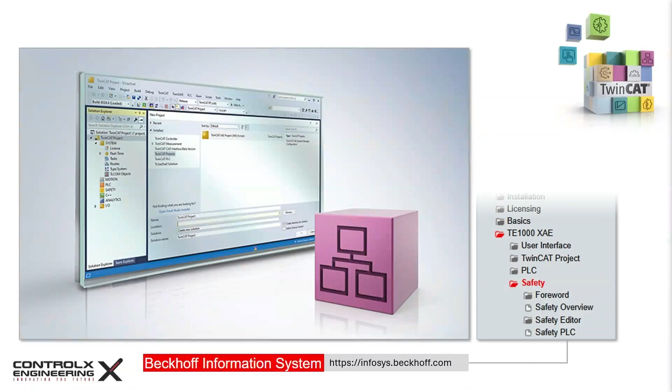The complete documentation for working with TwinSAFE can be found at Beckhoff Information System website.

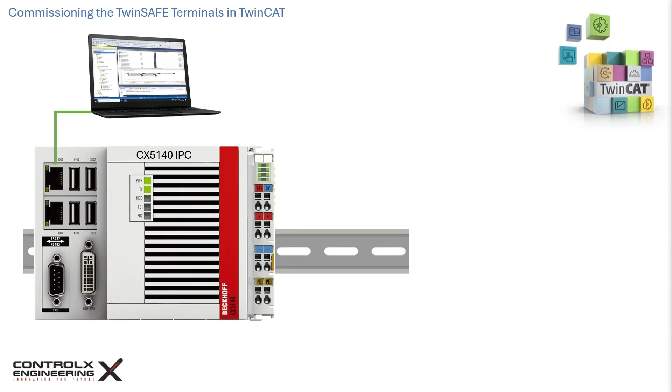Let's review my hardware setup for this tutorial. I will be using my CX5140 IPC. We will add a route to this IPC from my programming laptop, which I will use to create the PLC and safety logic. The first terminal in the configuration will be the EL2809, which is a 16-channel digital output terminal. We will link a standard PLC variable to control the green tower light connected to one of its output channels.

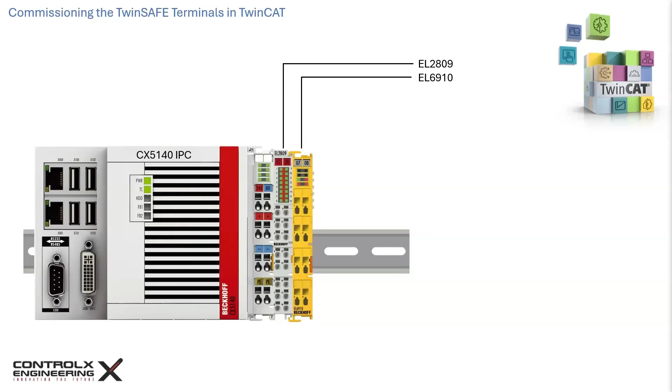Next, I've installed the EL6910 TwinSAFE logic terminal. This is where the safety logic will be programmed and saved. If you recall our application from part 2 of the series, we had a dual-channel e-stop, 2 push buttons, and a dual-channel safety door interlock switch. These required six input channels. Therefore, we required 2 EL1904 safe input terminals, each with 4 channels. And for our safety outputs, we have the 4-channel EL2904 terminal. Finally, we will terminate with the EL9011 end cover for protecting the electrical contacts on the last terminal.

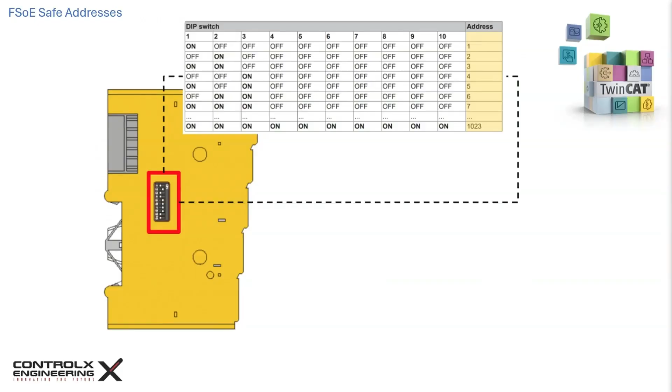In part 1 of this series, we reviewed the TwinSAFE hardware and learned how to set the safe addresses on the terminals using the 10-position dip switch block on the back of the terminals. Devices like the EL6910 and EL2904 have single dip switch blocks with 10 switches labeled from 1 to 10, which gives us addresses from 1 to 1023 as shown. Each FSoE address has to be unique and can only be used once within a network. Also note that 0 is not a valid FSoE address.

Last time I showed you how to manually set up the FSoE addresses for these terminals using their Alias devices. This time I'll show you how to scan the FSoE addresses automatically from the terminals via their aliases. If you don't know what aliases are, then I encourage you to check out the previous 2 parts of this series. To make it interesting, I have assigned random FSoE addresses to the 3 I/O terminals, and I will show you how to scan them in the hands-on portion of this tutorial.

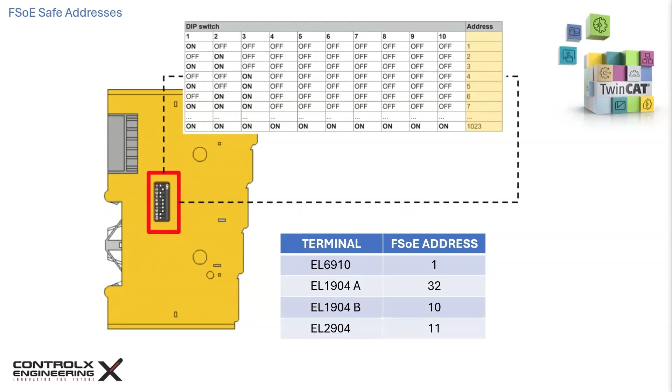Back in the safety node of the Solution Explorer, we already learned how to set up the EL6910 as the target system, which serves as an alias device for the EL6910 logic terminal. Since we did this virtually in part 2, none of this information was available. However, once we have the hardware connected, it will display the information from the EL6910 terminal. This field shows the serial number, which is unique for every logic terminal. It is also printed on the side of the EL6910 along with the date code.

This field will display the project's CRC code. After the safety logic has been downloaded to the terminal, the CRC of the program stored on the target system is displayed here. Currently it's displaying 0 because this is a brand new terminal out of the box. Checking these 2 boxes adds the mapping of the serial number as well as the project CRC, which will now become accessible under the EL6910 terminal in the I/O tree.

The serial number will be available as an unsigned double integer and can be linked to a standard variable, which makes it accessible to the PLC. The safe address is also retrieved from the logic terminal and displayed here both numerically as well as graphically, showing the position of the 10 switches on the dip switch block.

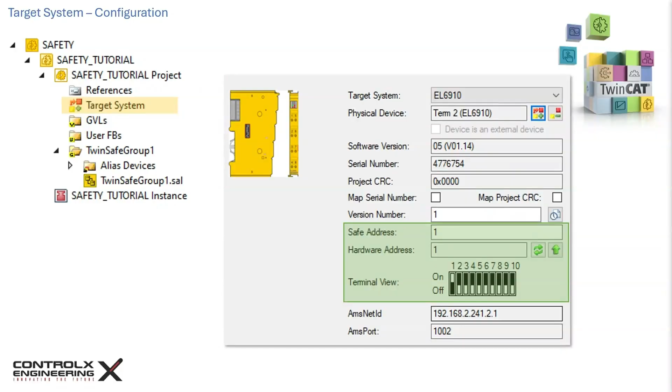The safe addresses of the TwinSAFE I/O terminals are configured in their respective aliases. Double-click on the alias for the terminal you want to configure. On the Linking tab, we can see the physical dip switch address here. For this terminal, the address is set to 32. Click on this green arrow button to assign the hardware address as the FSoE address.

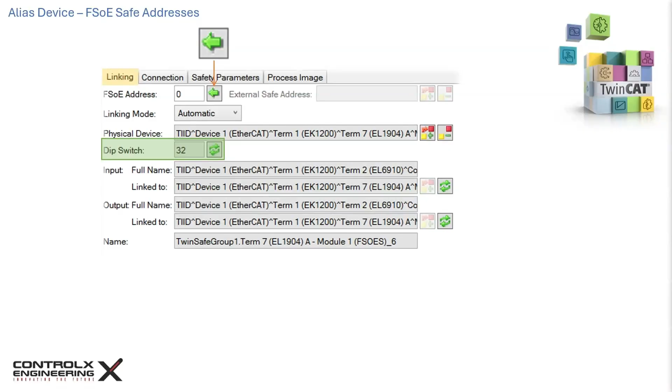This step needs to be repeated for all the safety aliases. However, this step can be taken care of automatically if the aliases are imported from the I/O devices directly. Next, move over to the Connections tab. The info data contains useful diagnostics information that can be made available in the process image of the logic terminal. This allows the information to be mapped to the PLC, if required, by linking with standard PLC variables.

I highly recommend checking these two boxes to map the inputs and outputs for all the TwinSAFE I/O terminals. This is particularly useful if you want to monitor the safety channels to display that information on your HMI. As an example, imagine a machine has multiple e-stops and safety switches. Mapping the inputs allows you to show the operator which device triggered the safety stop. Similarly, mapping the output applies to the EL2904 terminal to monitor the status of the output channels.

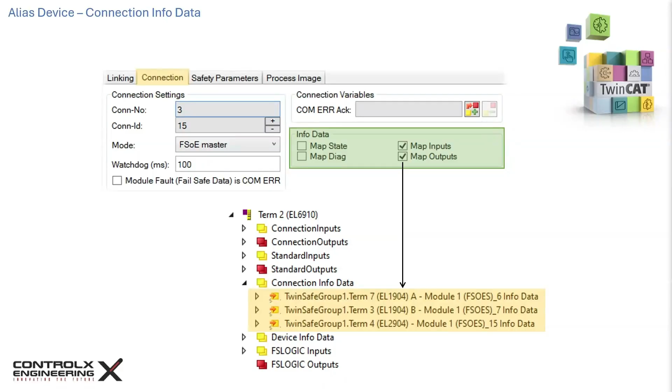Keep in mind that these mappings are for monitoring purposes only and cannot be used to change the state of the safety channels from the PLC. I will show you how to link the standard PLC variables to monitor the state of the safety channels next.

The Safety Parameters tab is available on both TwinSAFE input and output terminals. Here I'm showing the tabs for EL2904 and EL1904 terminals. These are advanced settings and have to be set correctly to match the required performance level for the application. I will not be covering this part in today's tutorial.

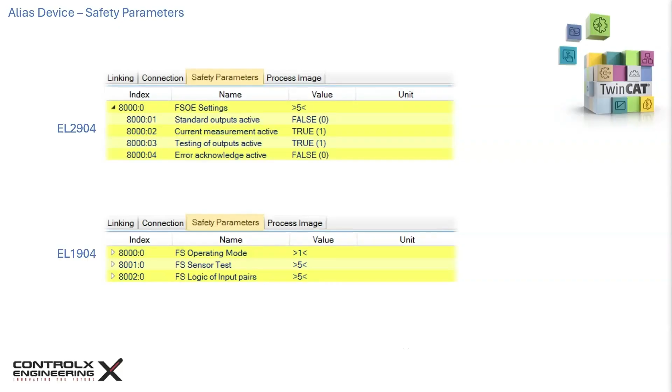The EL6910 has 8 LEDs as shown here, 4 for diagnostics and 4 for states. The diagnostic LEDs were covered in part 1 of the tutorial series. 3 of the 4 diagnostic LEDs are red and only the diagnostics 1 LED is green, which indicates that the operating voltage and internal tests are good. When the terminal is first powered, the diagnostic 1 LED should always be lit green.

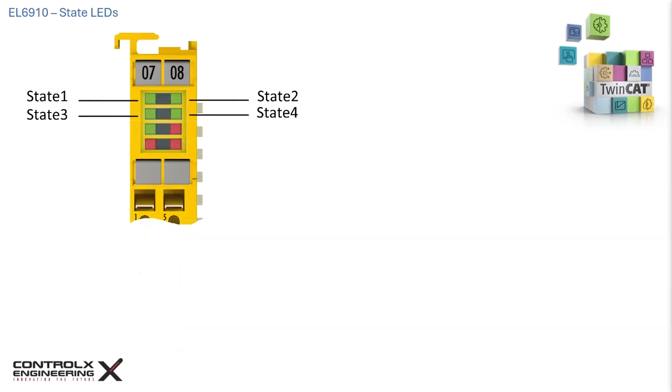The other 4 green LEDs indicate the state of the logic terminal. A brand new EL6910 out of the box has no program loaded on it. Only the state 4 LED will be illuminated when first powered up. The other 3 state LEDs are off. When a project has been downloaded to the EL6910 terminal, all 4 state LEDs will be illuminated at power up.

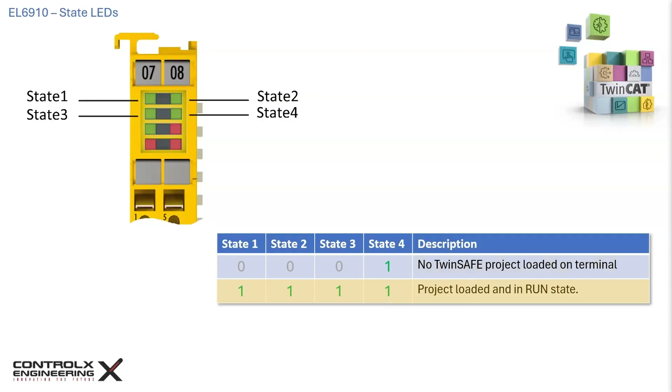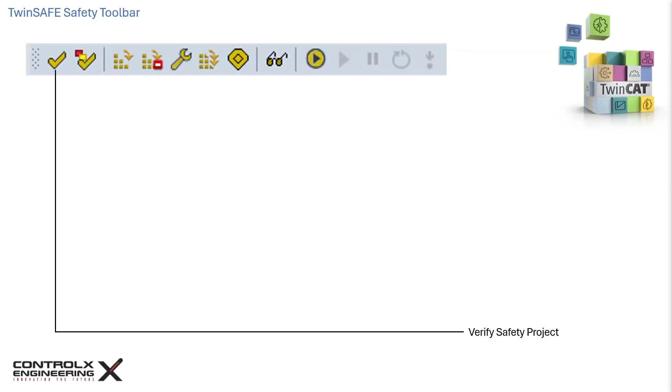Let's review the various toolbar options available for TwinSAFE. We have used this button previously when developing the safety logic. This option verifies the safety logic on the project level, meaning that only software properties are verified, no hardware connection. This option verifies the complete safety project on both the project as well as hardware level, meaning that hardware connections and availability are also validated.

This button allows downloading of the safety project to the target system. During the download process, the user credentials will have to be entered, like username, password, and serial number of the target system. We will review this process in more detail shortly. Logic can only be downloaded to the safety terminal after it has passed the validation check. This button allows us to delete the safety logic from the target system. User credentials will have to be entered similar to when downloading to the target.

The Customize button is used for advanced applications like switching off TwinSAFE groups and setting safe substitute values for the group outputs, etc. For this tutorial, we will not worry about this function. The multi-download button allows us to download all safety-related configurations and logic to the selected TwinSAFE target devices in one operation. This includes the compiled safety logic, safety parameters, and configuration data for all TwinSAFE modules associated with that logic terminal. It is essentially a batch deployment tool for safety projects.

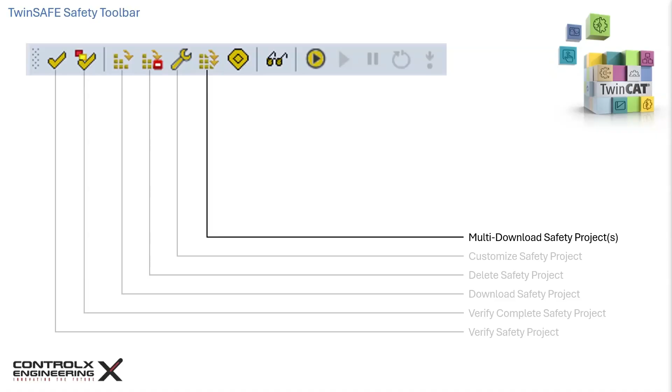While a standard download button sends the program logic to the target device, the Download Safe Addresses button specifically targets the FSoE slave terminals such as EL1904 or EL2904. Use this button if you have changed the safety address using a dip switch and only want to update the FSoE addresses without downloading the full safety project.

The Glasses button is my favorite. It allows us to view the online data for the target system. In this view, active connections and ports of the used function blocks are shown highlighted green, as we saw earlier. This button only works when both the safety application on the target system and the TwinCAT XAR runtime are running.

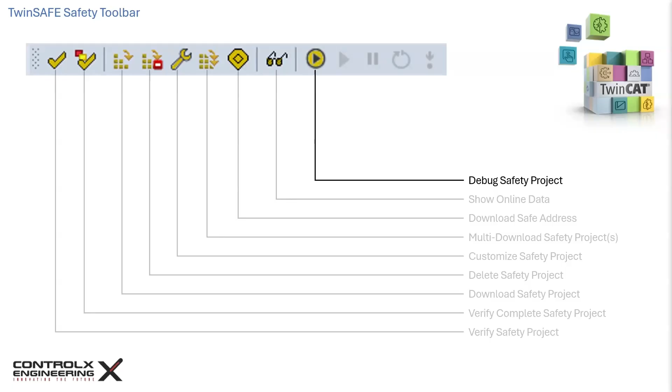The debug function allows us to test our program safety logic virtually inside the development environment without downloading it to the target system first. I demonstrated this feature in part 2, so make sure to watch that. The remaining buttons are all related to this debug function. Once you enter the debug mode, hitting this button starts the simulation. This button allows us to pause the simulation.

This button allows us to run one cycle only. When the simulation is running, we can hit the pause button and then use this button to execute one cycle. Similar to the one cycle function, this button allows even more granular logic execution by activating one function block at a time. Pressing this button again executes the next function block and so on.

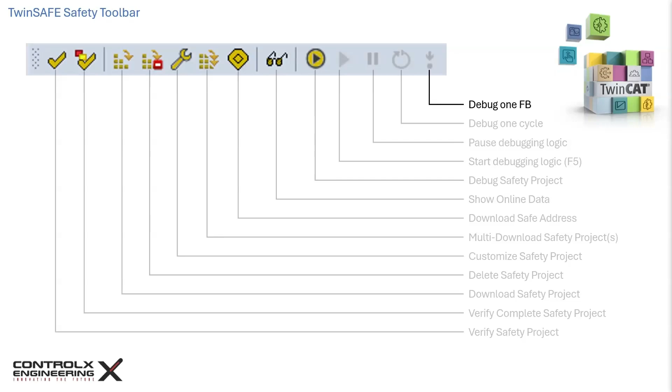The function blocks are executed in order of their execution number. If you look at the function blocks, they have a number on the top right corner, which shows their execution order.

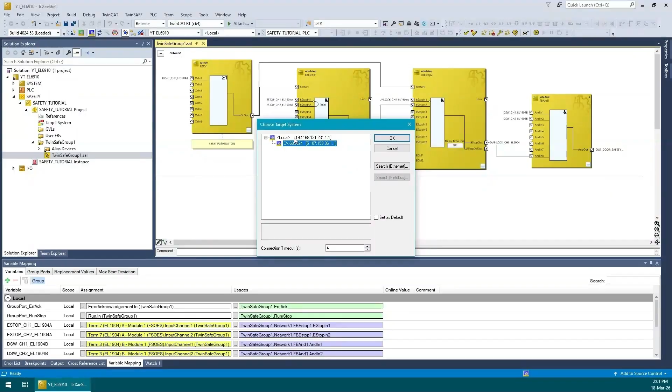Alright, now let's dive into TwinCAT and bring our safety logic to life. I'm in TwinCAT 3 and I have the project open from last time. This time I have my physical hardware connected, so my working laptop is connected to the CX5140 IPC from Beckhoff. The first thing we're going to do is connect to the IPC. So let's pretend we don't have this thing set up for us. We would go into search.

Now if you know the IP address of your IPC, you can type that in. In my case, it's 170.16.3.250, and it finds it right away. But let's try another way. We'll do search, and this time we'll do a broadcast search. Now it will give you an option of all the available adapters. If you know which adapter your IPC is connected to, you can just leave that one checked. In my case, it's connected to this one, so I'll leave everything else unchecked.

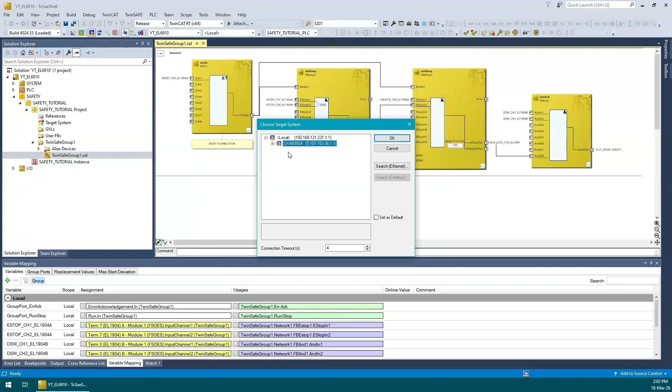It's doing a search, and it finds my IPC. Now for me, it's already connected. For you, if it's not, you would highlight it and click Add Route. Then we can close and select the IPC and hit OK. So now here you will see your IPC listed instead of local. So now we are connected to the IPC.

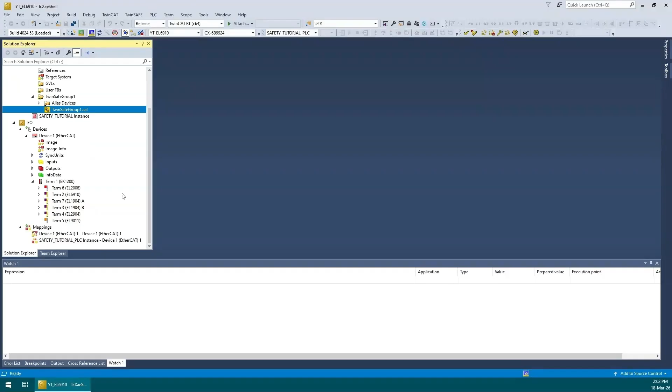Let's head over to the I/O section. We don't need this for now. Now this is my I/O. I'm going to collapse everything. Now the one big difference is if I look over my I/O, I have the EL2809 output channel, but in part 2 of this tutorial we worked with EL2008, so obviously we'll have to change that. But we have to do one more configuration setup before that.

Let's head over to the device, top level, and we have to modify the adapter. Right now it's set for this option. All my I/Os are on the PCI slot, so we'll select PCI. So if I do a search, these two are the RJ45 connectors. My I/O terminals are not connected to a remote coupler, they're connected directly to the IPC, so we have to select this. Now here it shows the selected PCI slot. Once that's done, we do a reload.

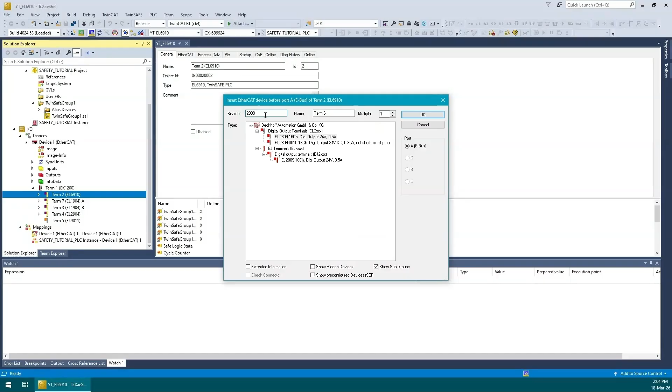And actually before that, I have to change this. So I'm going to go ahead and delete this card. And in its place, we are going to put the EL2809. Now remember, we have to do an insert to add an item on top of this. So from here, I can do a search, 2809, and that's my card. So that's added. Let's do a reload now. Now we can say no to activate free run.

And now let's head back to the top level and let's check out our topology. Let me just zoom into this. This is the offline topology, and this is my 2809, and then my logic terminal. This is the A, B, and 2904. So we can do a show topology. And once you see this, that means your online and offline topologies are matching. So far so good.

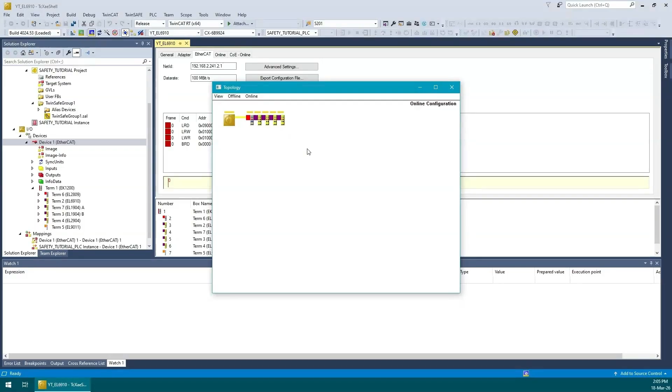We can close this. Now we are done with the I/O for now, so we are going to collapse this. And next thing we have to do is update the target system. So let's go back to the target system, hit the plus button, and select our EL6910. And now you will see it has populated all this information. We have the software version, serial number, and the project CRC. So currently it's 0 because there is no project downloaded onto the terminal.

Most important part here is the dip switch address. I have set it to 1, which we can see here, and it shows that numerically here. Now because we scan this in, the FSoE address is automatically taken from the hardware address. If for whatever reason this number is different, or if you have changed the hardware address after this step, we can click this up arrow and that will copy this to here.

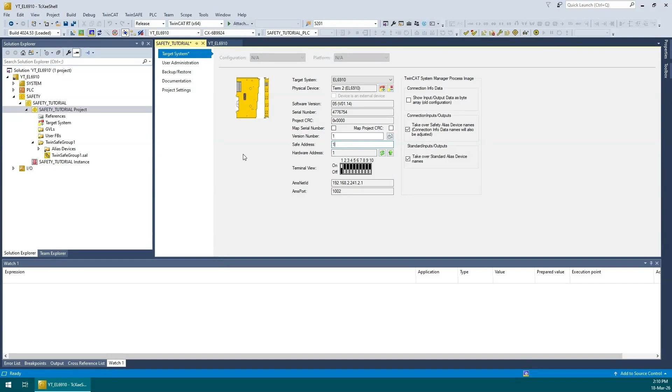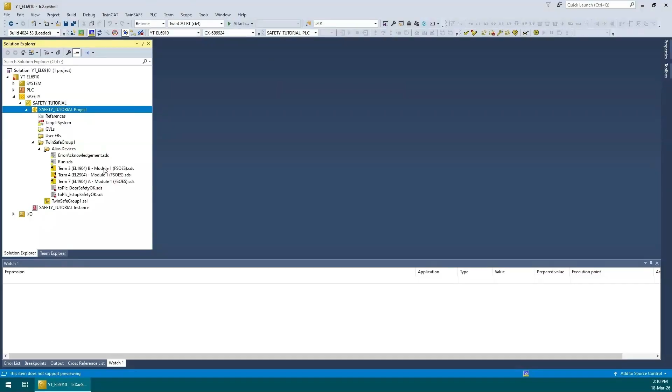Similarly, we have to update the FSoE address for all the other terminals. So I'm going to do a save and close this part. You can close this. Expand the alias devices and update the aliases for FSoE for all the 3 aliases. I'll start with term 7 A. So my dip switch is set to 32, but if you recall from the previous tutorial, we had set this manually to 4. So all we need to do here is take over, and it copies 32 here.

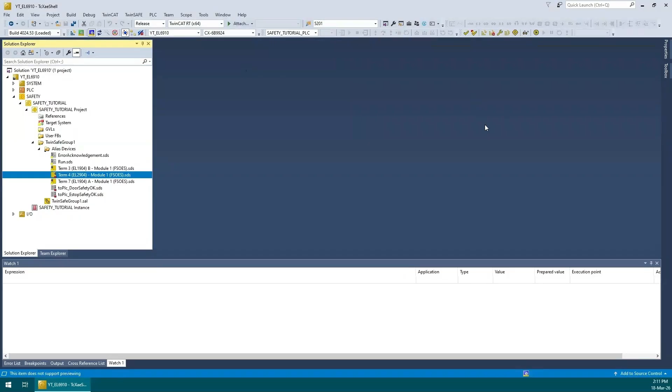Okay, all 3 addresses are updated. We can do a save all and close everything. Now we can do a safety validation. It says verification process succeeded. Let's just take a look at our safety project.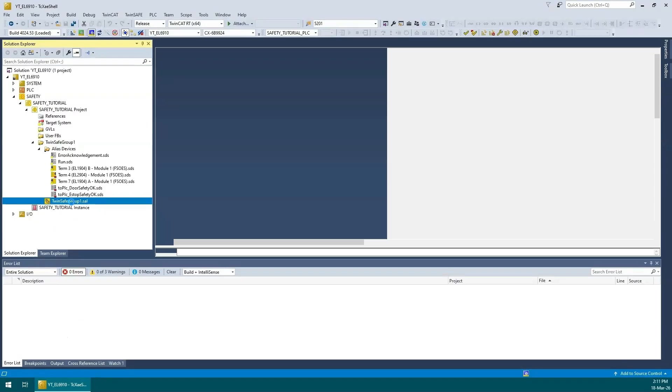In order to link all the I/O statuses to the PLC, we have to map the inputs and outputs. So let's do that. I'll go from top to bottom, go to the connections page and map inputs and outputs. Similarly for the other 2 cards. Now we can save all. And we do a build.

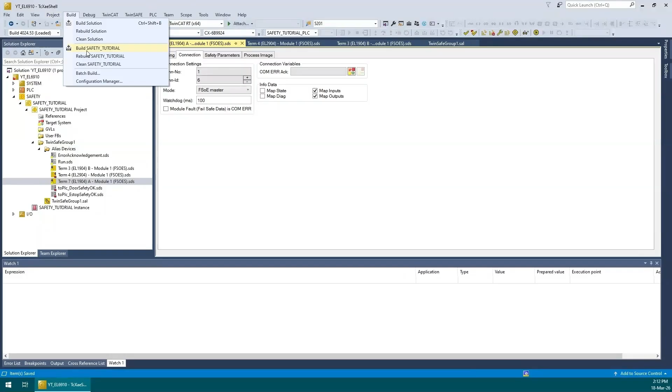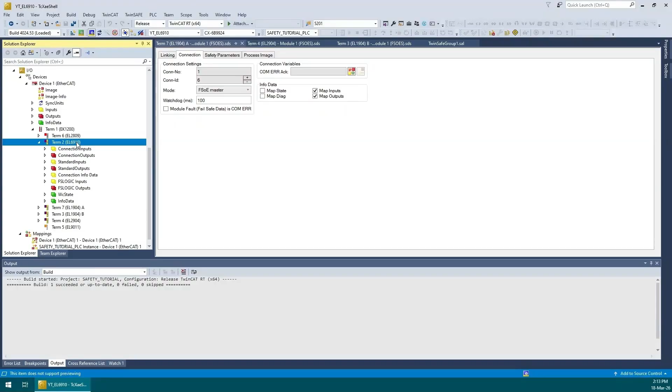Now we head over to the I/O section, expand the EL6910. We see this new item added here, which contains all our mappings. So this is module A. If you expand it, you have the 4 channels.

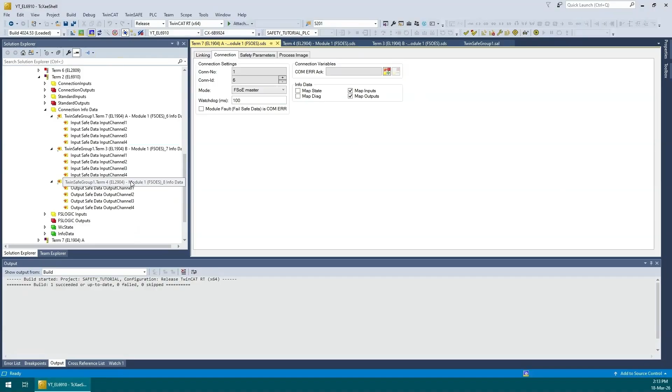So before we activate the project, we can create all the standard variables in the PLC and we can start linking them to here. So I'll go ahead and do that now. Let's head over to the PLC side and we'll create a new GVL.

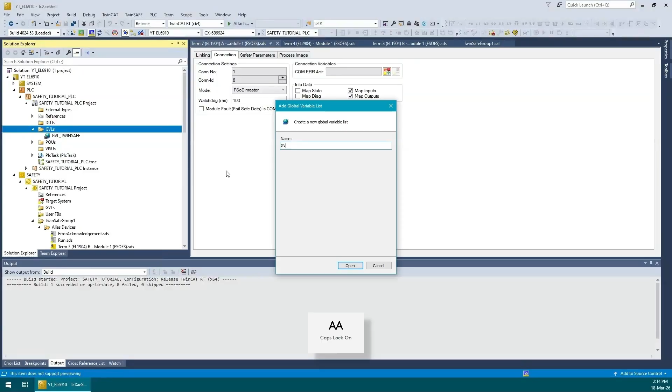My variables are created. So let's just do a quick recap. I have my e-stop on channels 1 and 2 of A, my reset push buttons on channel 3, and the unlock request buttons on channel 4. My door switch contacts are connected on channels 1 and 2 of the second safety input card. My safety output relays are connected on the channels 1 and 2. The lock command for the safety switch is on channel 3, and the door safety OK relay is on channel 4. So I'll go ahead and link these to the channels. But before that, we have to do a build.

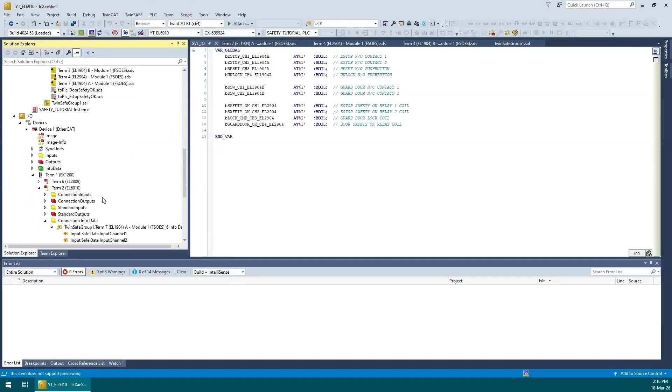Now if you look at the PLC safety instance, which is right here, if you expand this, our inputs contain all these variables. These are the only 2 outputs. So let's go ahead to the EL6910 in the I/O terminal and start linking them. So you would link these just like any other terminal. You can right click, do change link. This is channel 1 on A.

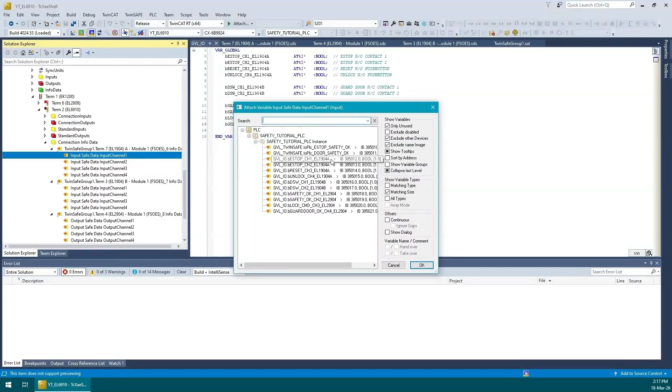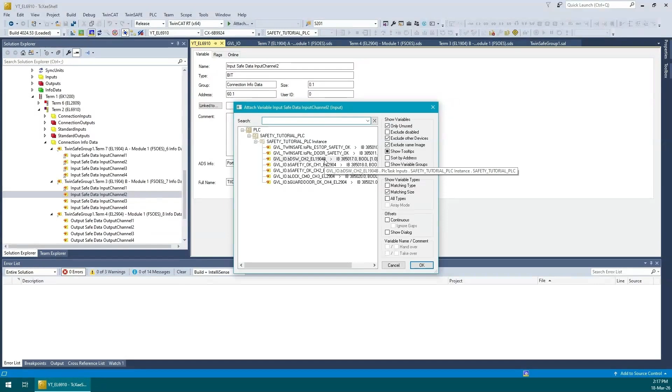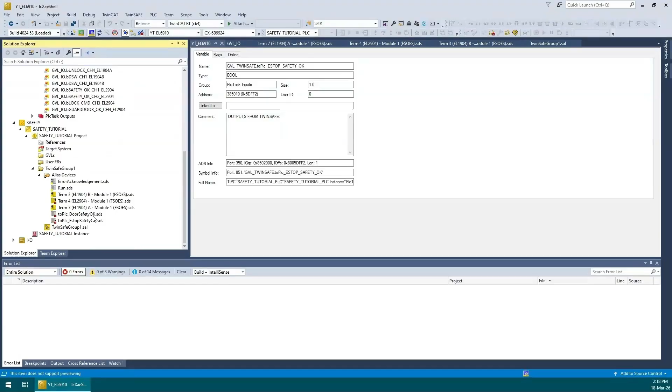Or we can double click and use this part, channel 2, channel 3, so those inputs are connected to the I/O. I also have these 2 aliases which need to be linked. So the 2 PLC safety OKs, e-stop safety OK and door safety OK, which are these 2. So if you look at our PLC instance and PLC task inputs, they're all connected.

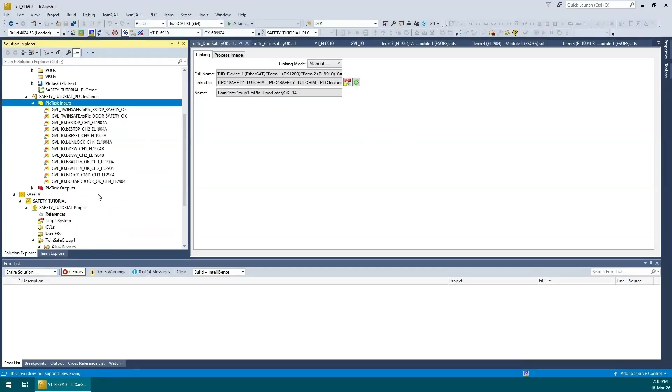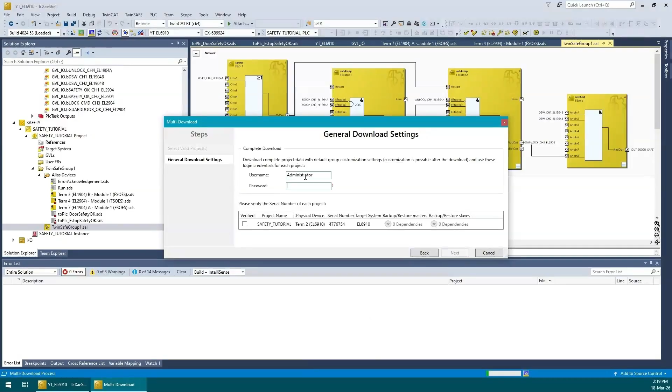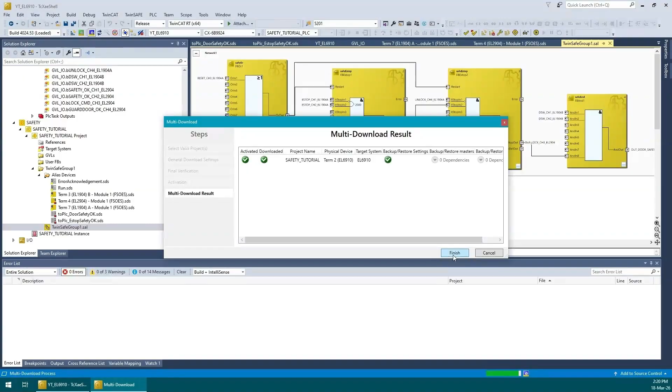Now we can head over to our safety logic, do a safety validation check again, and now we can proceed with the download. So you can either do a complete safety download or you can do a multi-download. We select this, next. The username is administrator. Password is TwinSAFE. Enter the password one more time. Process succeeded. Now we can go ahead and activate the project.

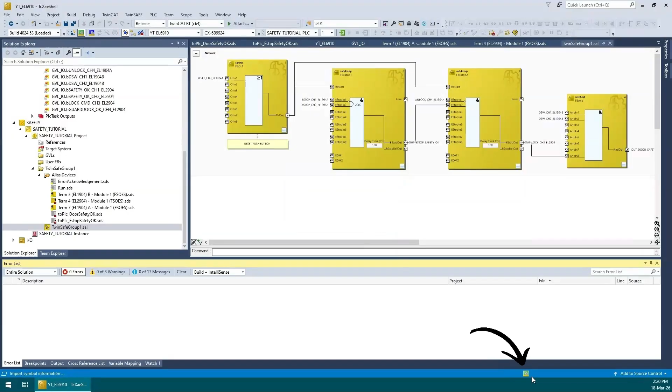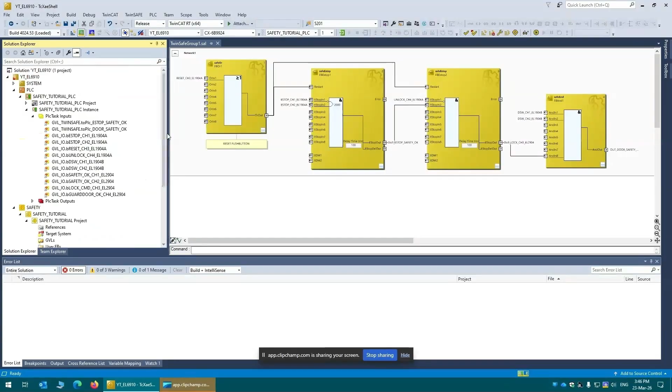Restart in run mode, yes. Now this icon will turn green and my IPC is in run mode. Okay, I'm ready to test the logic. In order to make this more intuitive, I'm going to share a visualization I created, which maps all the TwinSAFE inputs and outputs, so we can see it more visually. So to do that, I am going to collapse the instance. Here's my visualization. Let's reorganize the screen.

Here's my visualization, and I have mapped all the EL1904A inputs. So first two channels are the E-stop, which is a dual contact, normally open and normally closed E-stop. I have the reset push button, unlock push button, and on the other EL1904, I have the two channels of the door switch. On the safety output terminal, I have the first two channels, power relays 1 and 2. This bit locks the guard door interlock, and this is another safety output that indicates the door safety OK.

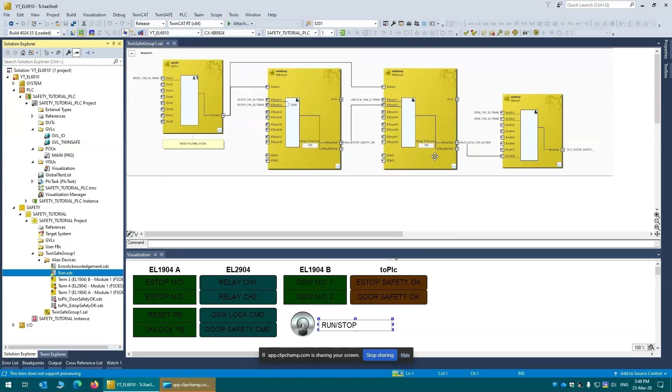This one is linked to the TwinSAFE run alias, which will put TwinSAFE into run mode. So let's go ahead and log in. Okay, TwinSAFE starts in stop mode. I'm going to toggle the run bit. Now my TwinSAFE group is in run state. Let's test the push buttons. So I have my reset push button and my unlock request push button.

My guard door is actually open, so let's close the guard door. You can see these two inputs indicate my guard door is closed. My E-stop is actually pushed in. That's why when I hit the reset button, there is no reset. So in order to do the safety OK, let's pull the E-stop out. So my NO is open, NC is closed.

This condition is satisfied. So when there's a reset rising edge on the reset push button, it should reset this function block. And once this output is true, another toggle on the restart should turn on this output. So let's do the first restart. So my safety OK bit is true. My two safety relays have closed. My guard door is still unlocked.

So let's hit the restart one more time. So door lock switch is set. My interlock is locked. And door safety command output is also true. This output can be used on the robot controllers, motion controllers, STOs, and that kind of things. So let's say the operator wants to go inside the robot cell to do some tooling change or maintenance or whatever. So he pushes the unlock push button.

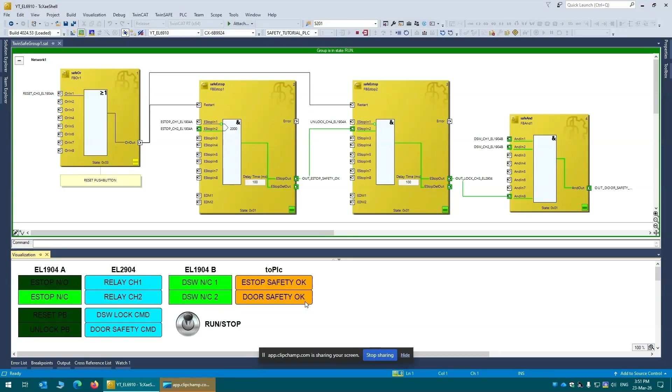He hits the reset push button. That locks the door. The machine is fully operational. All motion STO has been restored. Motion is functional. Conveyors are moving. The robots are functional. Now let's say there is an emergency situation. So the operator hits the E-stop. That drops our safety relays out. So the machine is fully disabled. All functions have been turned off, including the door switch.

And of course, all this information is being relayed to the PLC by means of these two bits. So now the PLC can do other non-safety related tasks, maybe indicate some stack light, tower light. And speaking of tower light, remember that green tower light we connected to EL2809. That can actually be tied to this bit. I'm not going to show it in this tutorial. We already know how to link EL2809 or other standard digital output terminals. So I've demonstrated full safety compliant SIL3 rated safety logic using the EL6910 and the input and output terminals.

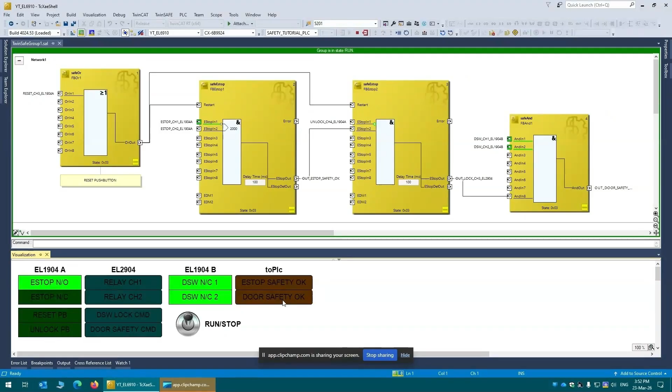The last thing I want to demonstrate before we wrap this episode up is the document generation. So head over to the TwinSAFE menu and you'll see an option for generate documentation. So let's try that. So it populates today's date. You can modify the editor name, and we can hit generate. I will save it on my desktop. It's called Safety Tutorial. Let's take a look.

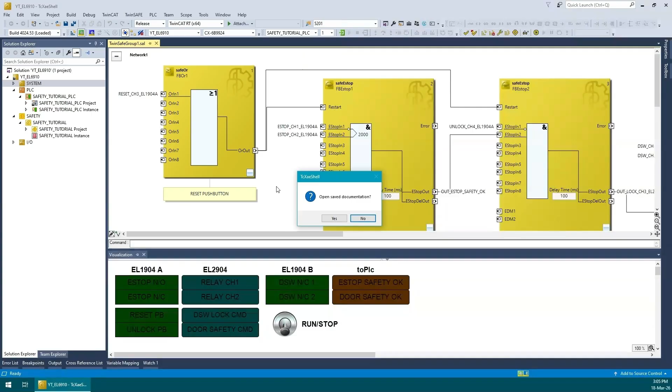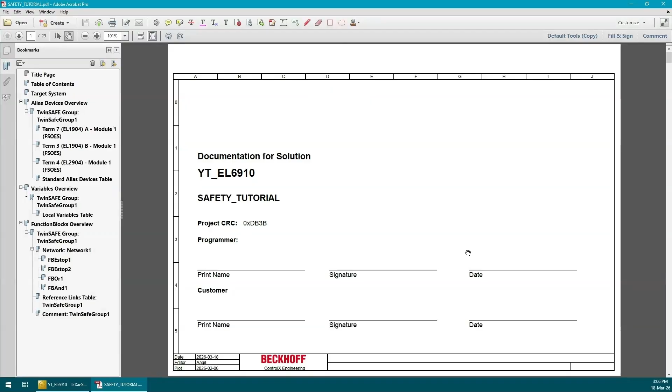So I generated this 29-page documentation. The project CRC is shown here, name of the solution, name of the project, and then we can add our programmer and customer information here. It shows the target system with the serial number and the CRCs, as well as the safe address. Overview of all the alias devices. Information about each alias device.

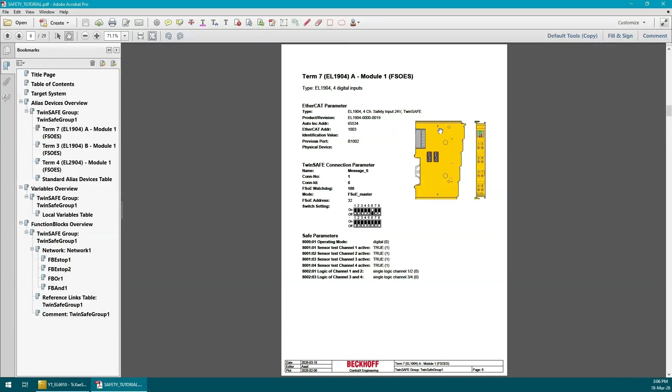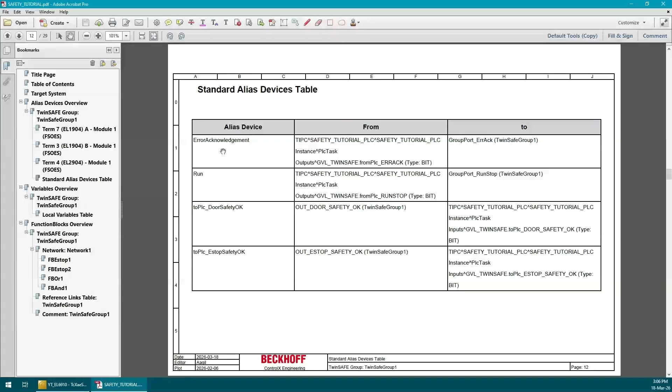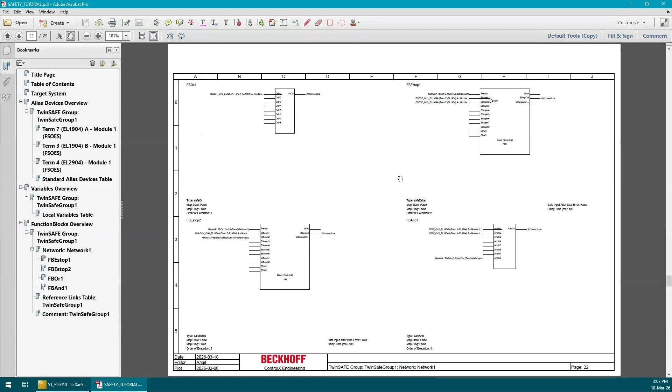All the standard alias device table. So these are the ones we link to the PLC, and it shows going from and to. All the local variables and the PLC are also added, shown here. And here I think it shows all the individual function blocks for the network. All the variable assignments and usages.